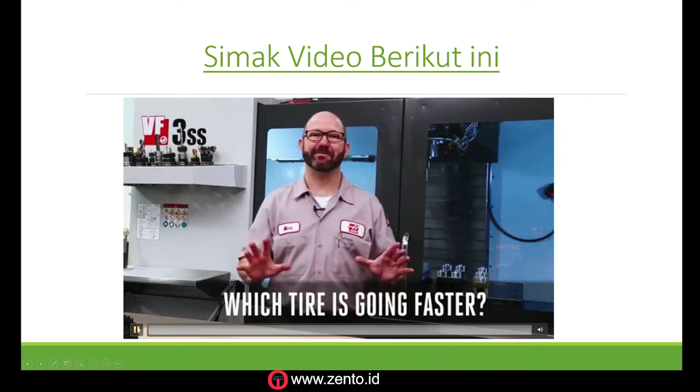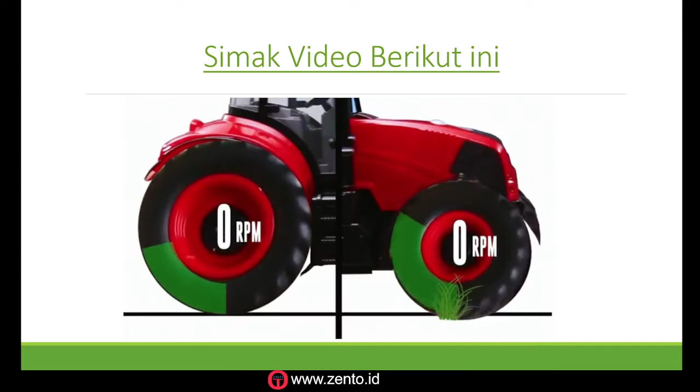That's it, pencils down, answers? I know, it's kind of a trick question. It depends on what I mean by faster. If what I am asking is how fast the tires are moving across the surface of the ground where the rubber meets the road, then both tires are traveling at the exact same speed, 17 surface meters per minute. Both tires travel the same distance where it matters, along the tire's edge. Now, if we're talking about revolutions per minute, RPMs, that's a different story. While both tires cover the same amount of ground, the smaller tire had to make more revolutions per minute to get there.

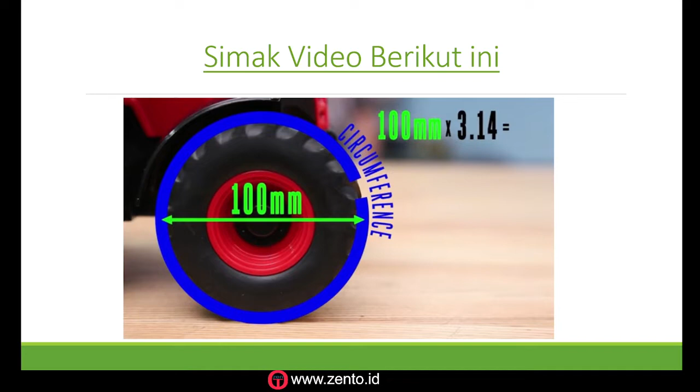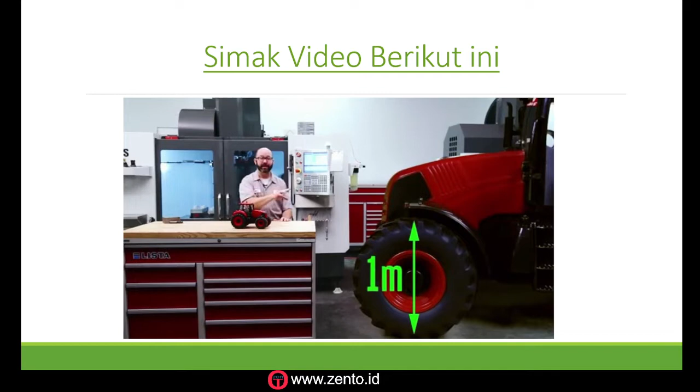If we want to calculate how much ground a tire will cover with each revolution, we need a ratio between a tire's diameter and its circumference. Someone has already figured this out for us and given this ratio a name, pi. The ratio between a circle's diameter and its circumference is pi. So no matter what diameter our tire is, the distance around the outside of that tire, where the rubber meets the road, is always 3.14 times greater. This tire, at 100 millimeter diameter, has a circumference of 314 millimeters. 100 times pi is 314. This tire has a diameter of 1 meter and a circumference of 3.14 meters. 1 times pi equals 3.14.

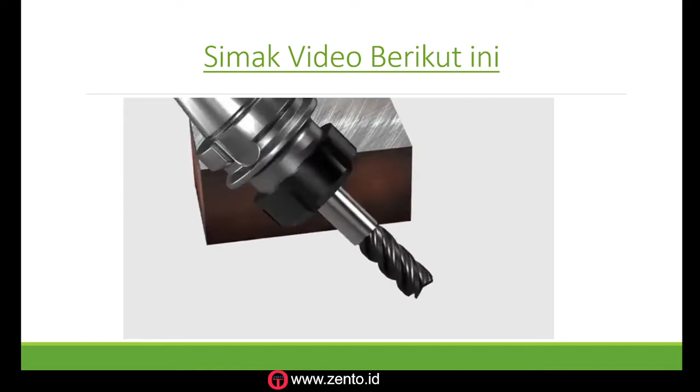Okay, back it up, get out of here. If we were to run our tires too fast, too many surface meters per minute, they would overheat, blister, and fail. Our end mills work in the same way. There's a limit, a maximum cutting speed that a specific tool can go on a specific material. Any faster, and it begins to overheat and quickly wears out.

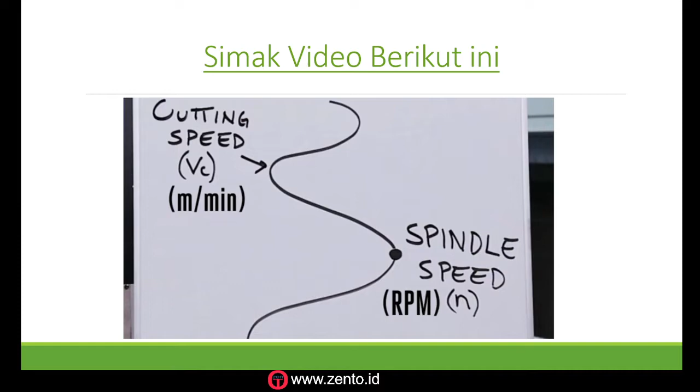In machinist talk, if we're talking about speeds, like speeds and feeds, we could be talking about one of two different things: cutting speed or spindle speed. Our cutting speed, VC, is our surface meters per minute, the speed our tool is turning at where the rubber meets the road, where the tool meets the part. Our spindle speed is simply our revolutions per minute, our RPM.

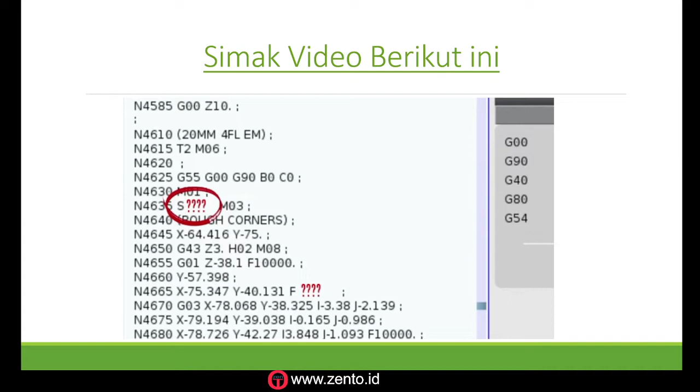We'll get our tool's cutting speed in meters per minute right from our tool catalogs. But the control, the Haas machine, needs an RPM value, a spindle speed, that's our S code. To get from here to here, we're going to use a formula that makes use of pi and our tool's diameter to convert our meters per minute into an RPM value, a spindle speed. Once we've got that RPM value, we can calculate our feed rates, speeds and feeds.

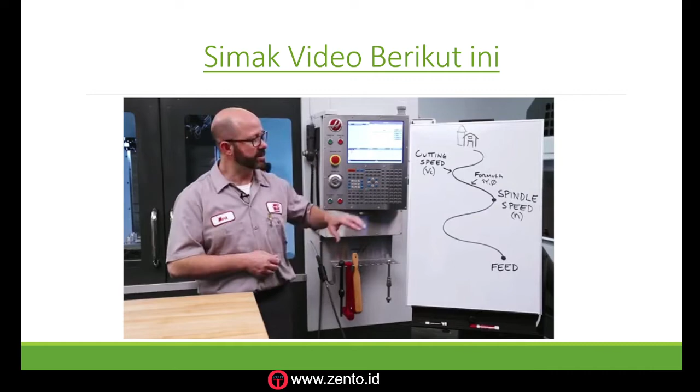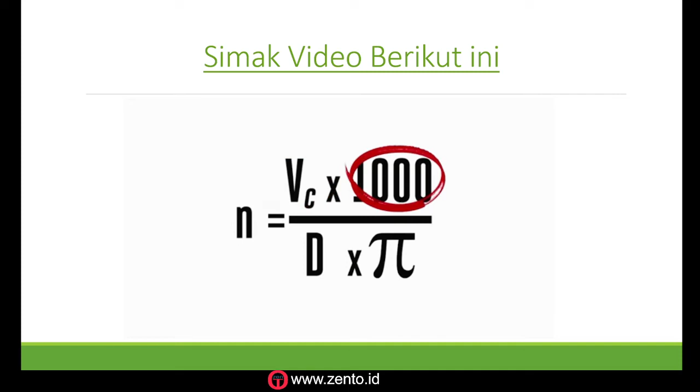Here is our formula to calculate our RPM. I'm going to start using some symbols, some notation, because those are the symbols being used by all the tool suppliers now, and you'll need to recognize them. RPM equals cutting speed times 1,000, all divided by our diameter times pi. N is our RPM, revolutions per minute, that's the S code in our program, what we're trying to solve for. VC is our cutting speed, our surface meters per minute. D, or sometimes DC or D1 depending on the catalog, is our tool diameter in millimeters. The 1,000 in this formula converts our meters per minute into millimeters per minute.

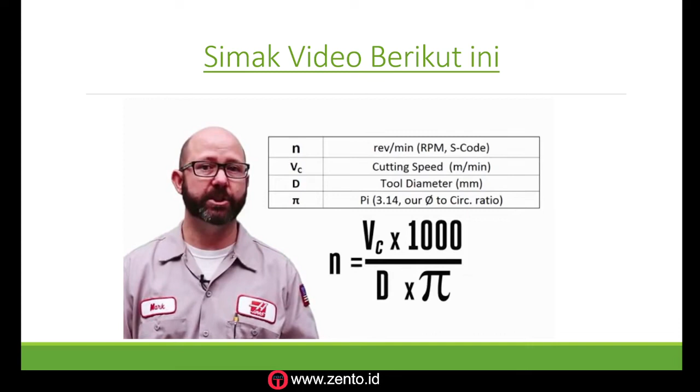This formula works fantastic, but we're going to simplify it a bit using algebra. We're going to divide the 1,000 by pi. 1,000 divided by pi is about 318. We're going to use this simplified formula for the rest of the video.

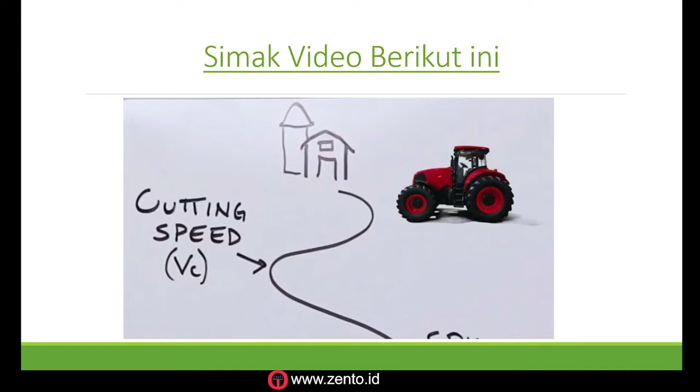Before we open up our catalog and get our cutting speed, before the tractor even leaves the barn, we need to know exactly what cutting tool we're going to use, and we need to know exactly what material we are going to be cutting.

In the good old days, all we really needed to know was whether our end mill was high-speed steel, carbide, PCD, or CBN. Those days are gone. Today's tools have coatings that might double their allowable cutting speeds, so we really need to know what tool we're working with. Otherwise we'll have to use generic values, which are pretty wimpy.

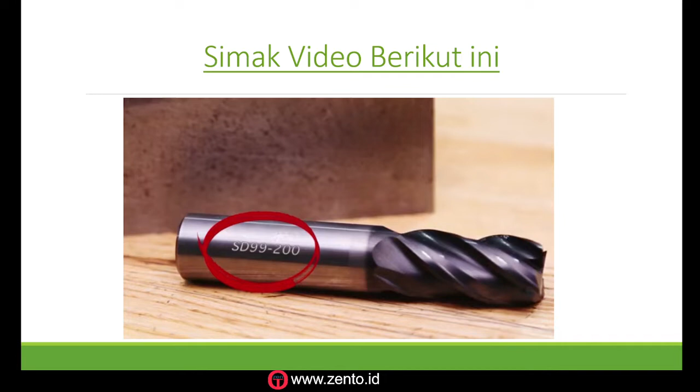With our exact tool number in hand, we can go to our tool catalog. We can download the manual for any tool manufacturer in PDF form. Once that catalog is opened up, we're going to search for the material group section, which tells us what material group our exact material falls into.

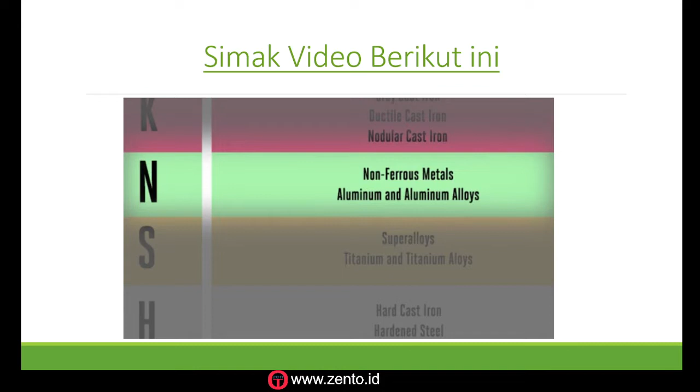Our materials are color-coded. P is for steels, M is for stainless steels, K is for cast irons, N is for non-ferrous metals without iron in them, like aluminum or magnesium. S is for our super alloys, materials like titanium, and H is for hard cast irons or hardened steels.

I am working with a 4140 steel. At least that's what we call it here in the United States. If you're in Europe using EN names and numbers, this might be called 42CrMo4. If you're in Japan, you'll call it something different. But no matter where you are in the world, this material is going to find itself in the P ISO material class.

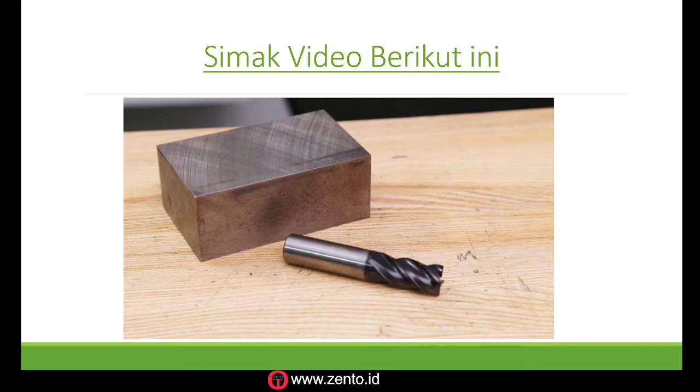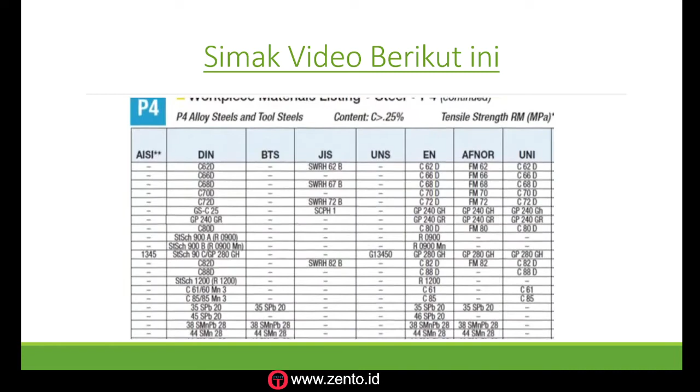Now, the number that follows our color-coded ISO letter changes between manufacturers, so be careful here. Kennametal calls this material a P4. Niagara and Seco may call it a P5. Sandvik classifies it as a P2.1, while ISCAR and WIDIA might call it a P6 or a P7. Same material, different tool vendor.

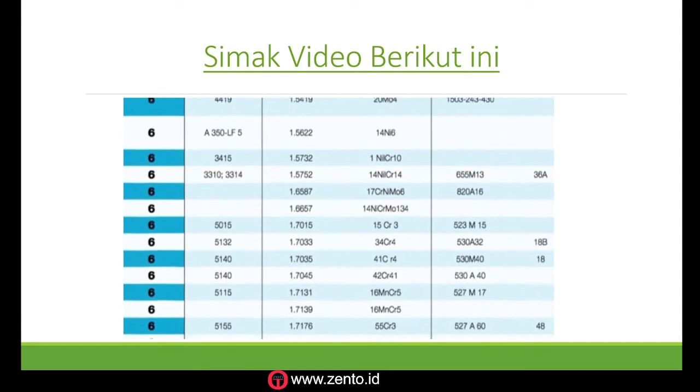Now, it's important that we get this right. If you don't choose the right material group, you are going to burn up your tools. Titanium has a different machinability than mild steel. If you try running a drill or an end mill in titanium at cutting speeds meant for mild steel, you are going to melt that tool. It will overheat and fail.

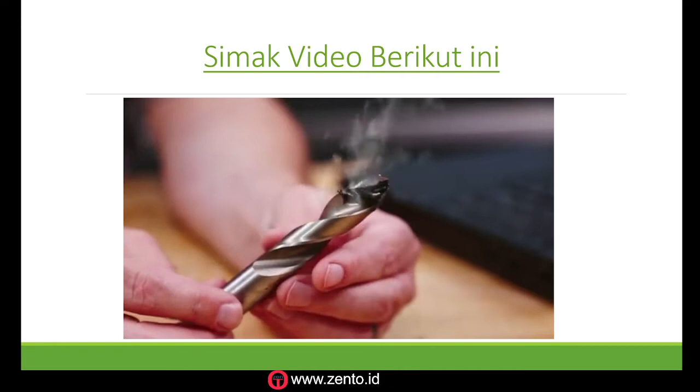So if you can't find what material group your stock should be in, then give your tooling representative a call. They would love to hear from you.

How many tooling reps out there would love to hear from one of our viewers and talk tools? Yeah, that's what I thought.

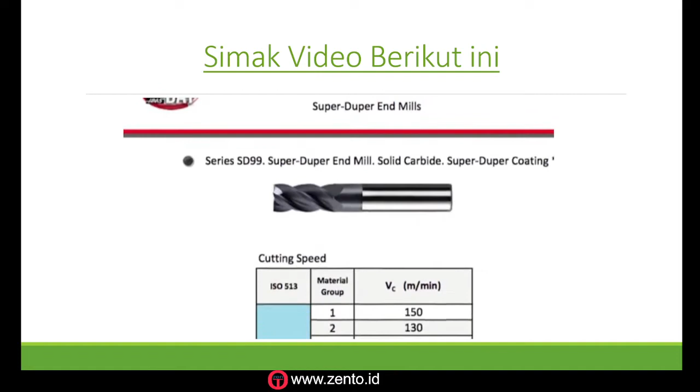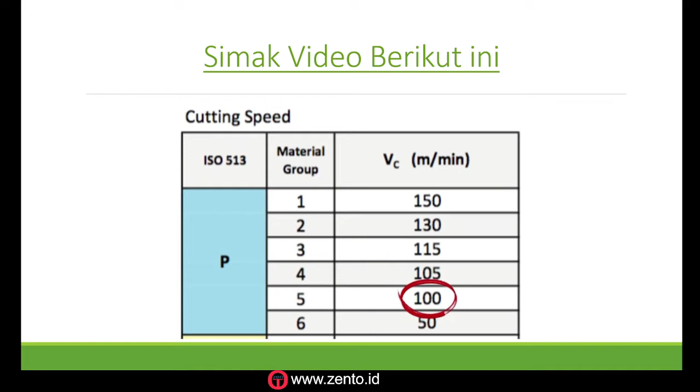From the section of the manual for our exact tool, under the row that lists our material group, P5 in our case, we're going to find our cutting speed, our VC, our meters per minute. If your catalog gives you a range of values there, then you'll make your choice based on the length of your tool, how strong your setup is, and how aggressive we tend to cut. In general, the more rigid the setup, the faster we can go with our cutting speeds. But remember, tools tend to last longer, have better tool life at lower cutting speeds.

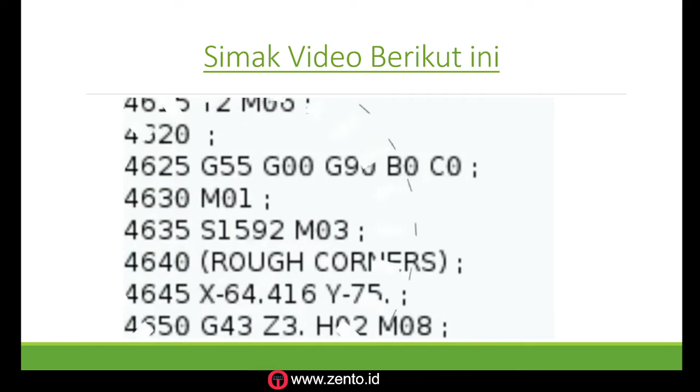For my tool and material, we're going to use a cutting speed of 100, that's 100 meters per minute. I'm using a 20 millimeter end mill, so we'll drop in 20 there. And after a little bit of math, we come up with an RPM value of 1,592. So our S code back in our program is going to be S1592.

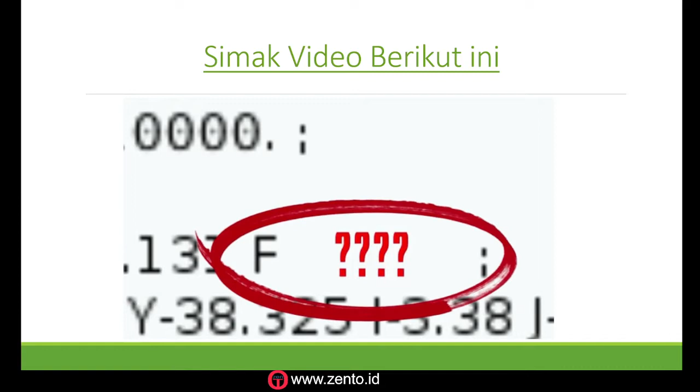We now have a cutting speed, an RPM value that we can use with our tool. We now know how fast to spin our tool, our speed. The control now needs our table feed, our F code or feed rate. The feed rate is how far the tool will travel in 1 minute in millimeters along the tool's center line.

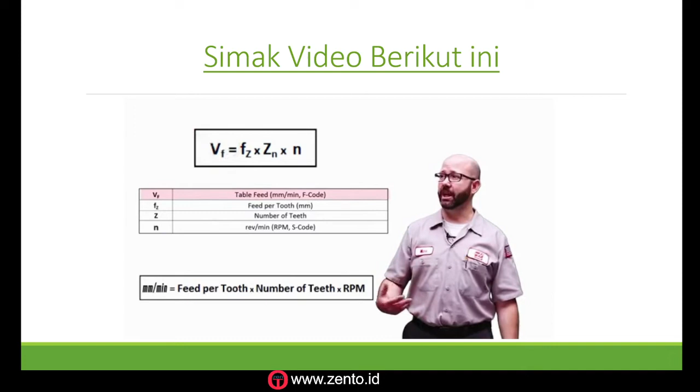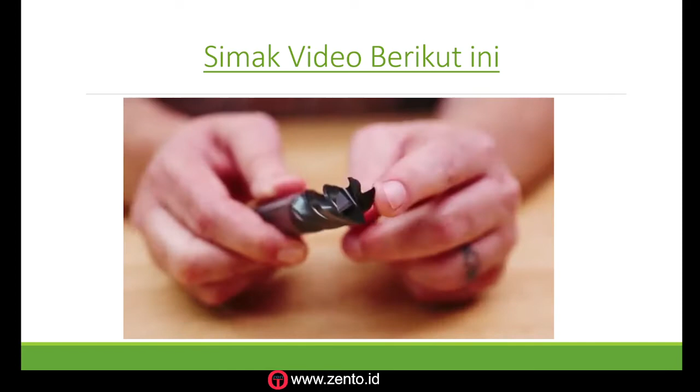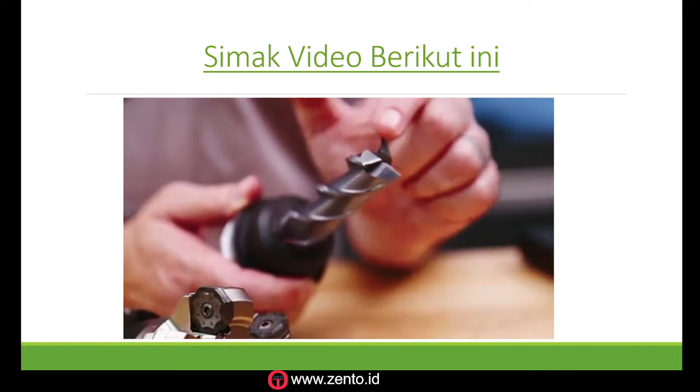Here's our feed rate formula for end mills. We've got our table feed equals our feed per tooth times the number of teeth times our RPM. So what's a tooth? This is a tooth, just a cutting edge along the outside of a tool. An insert is also a tooth. For most tools, the number of teeth matches the number of flutes. This tool has 3 flutes, 3 teeth. This tool's got 6 teeth, and this one's got 4.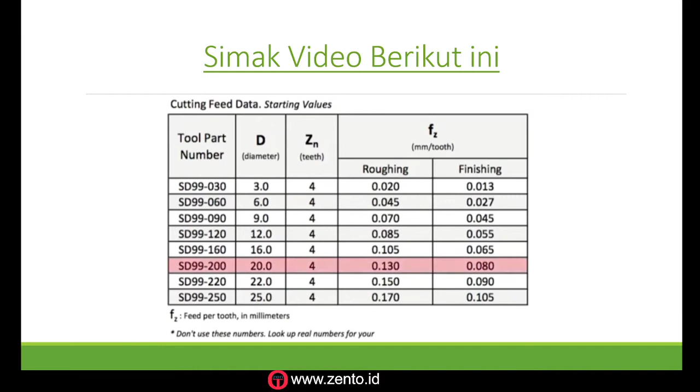We want our tool to take a very specific size bite with each tooth. This is our feed per tooth in millimeters. Just like our cutting speed, the book, or PDF, will give us that feed per tooth value. The catalog says that for my tool, material, and type of tool path, 0.08 millimeters per tooth is a good starting range.

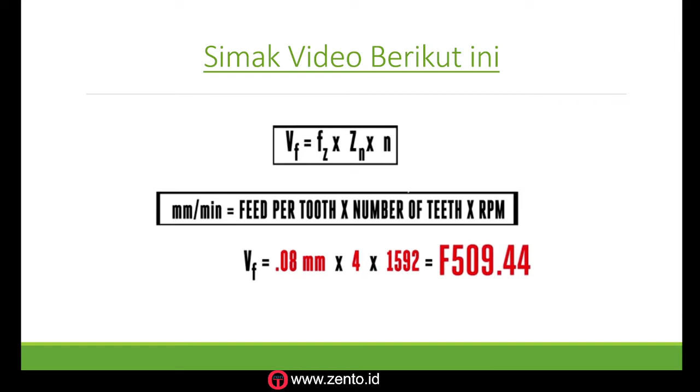0.08, our feed per tooth, times 4, our number of teeth, times 1,592, our RPM, will give us our millimeters per minute feed rate, F509.44. Again, this is how far the central line of our tool will move along its programmed path in millimeters.

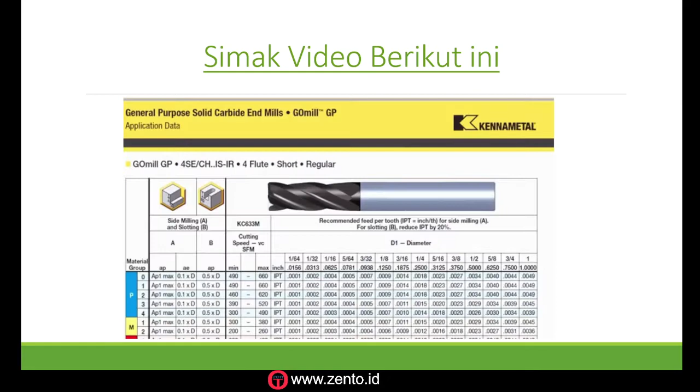Each and every minute. Some manuals will just give out a single feed rate for all cutting conditions, but most will give us at least two possibilities, one for slotting and one for side milling. Our AE is our width of cut, that's our step over, that's our radial depth of cut, and our AP is our axial depth of cut, how deep the tool is moving in the Z-axis.

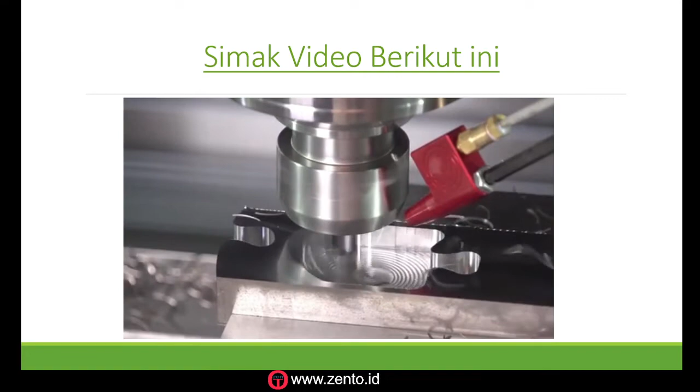Most times, if you're slotting, your bite is going to be about 20% less than if you're just side milling. With the popularity of optimized tool paths like dynamic, adaptive, volume mill type high-speed machining tool paths, the tool manufacturers are getting more and more specific with their speed and feed recommendations. So you'll often see charts like the one we'll show you here listing all kinds of different tool paths. You'll choose one and then match your speed and feed to the path that you're using.

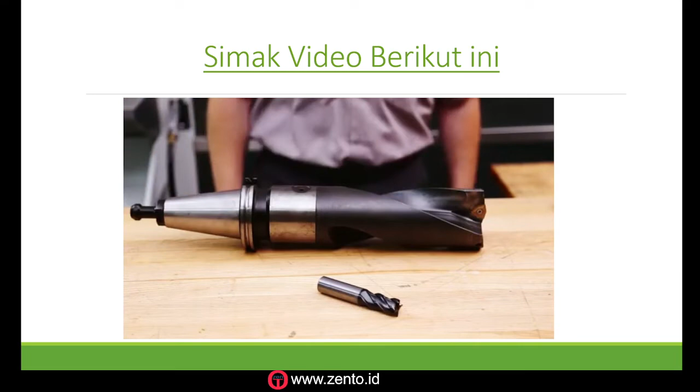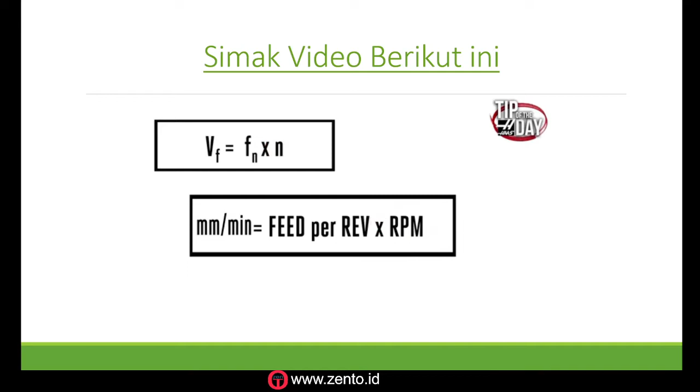Now, if you are dealing with drills and not end mills, our feed rate might be listed in our catalogs as a feed per revolution and not a feed per tooth. We just multiply the millimeters per revolution chip load from the book times our RPM to get our feed rate in millimeters per minute. Now watch out for and know the difference between millimeters per tooth, FZ, which we typically use for milling tools, and millimeters per revolution, FN, which we often use for drills.

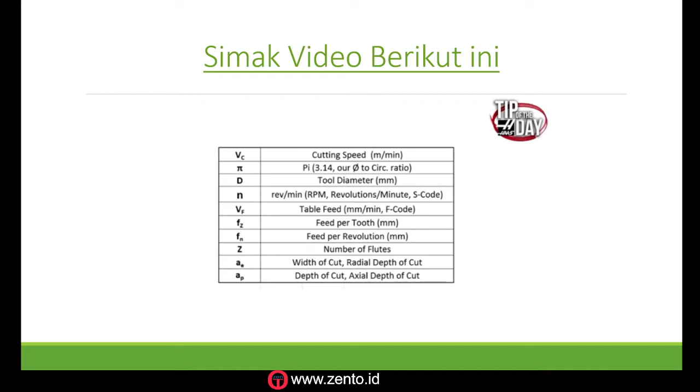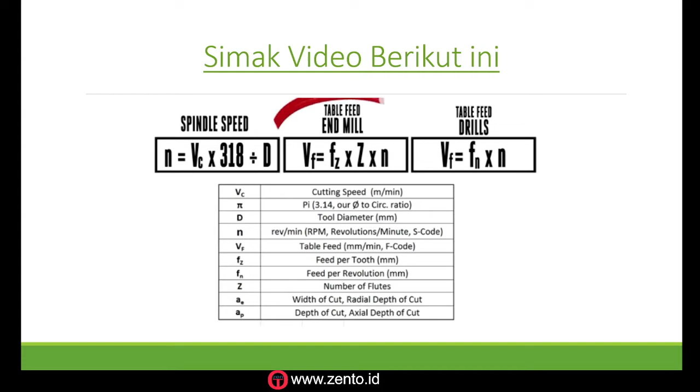Here's that completed legend and the formulas we typically use for calculating our speeds and feeds. We've got our cutting speed formulas, spindle speeds. We've got our feed rate formulas for both end mills and drills. And we've got all of the notations, all the symbols that you're going to see over and over again in your tool catalogs.

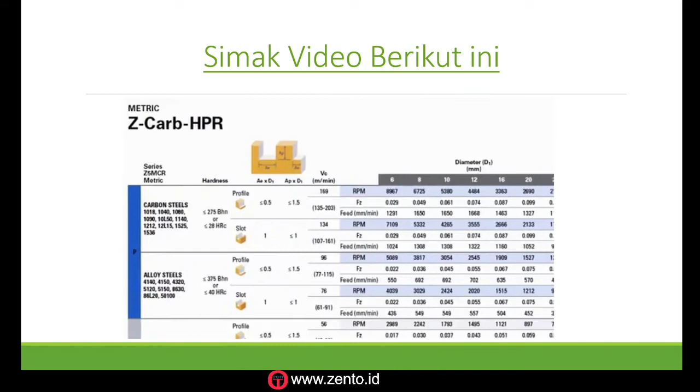With all of that said, there's a big shift happening with tooling catalogs in general. A lot of these tooling catalogs are just giving us our feed rate and RPM values. No formulas needed. You may open up your manual and find that you don't have to do any math at all.

Okay. In the past, we used to have to rely on slide rules to calculate our RPM and feed rate. I still like these. I think they're great. But today, we're more likely to use an app on our phone or a piece of software on our computer or the speeds and feeds calculator right on the Haas control.

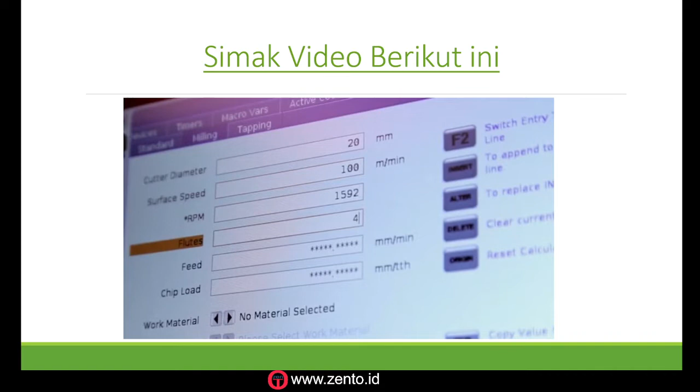On machines with next-gen controls, you can reach the milling calculator by pressing current commands and navigating to the milling tab. We've made some videos that help you calculate those tapping feed rates. We'll link to those in the description.

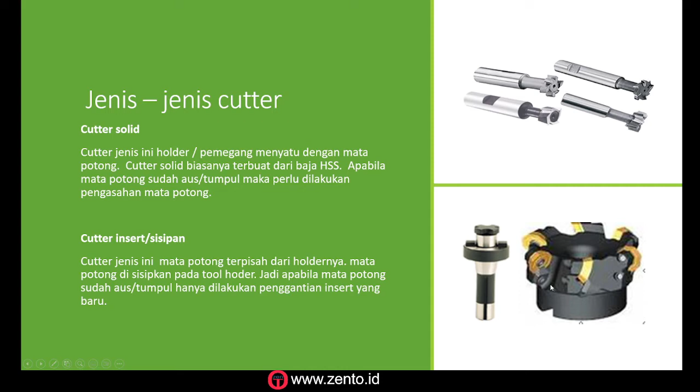Pada cutter insert atau sisipan jenis ini, mata potong terpisah dari holdernya. Ini holdernya, dan ini mata potongnya yang berwarna kuning. Mata potong itu disisipkan pada tool holder atau pemegang tool. Jadi apabila mata potong sudah aus atau tumpul, hanya perlu dilakukan replace atau penggantian insert yang baru, tidak perlu mengasah. Kita buka bautnya, lalu ganti dengan insert yang baru. Seperti itu pada cutter sisipan.

Macam-macam cutter milling, ada beberapa macam. Misalkan ini yang facing, disebut face mill. Face mill ini fungsinya untuk melakukan pemakanan rata atau facing seperti ini.

Kemudian yang ini ada shell mill, dia pemakanan ujung dan samping. Kalau face mill dia hanya ujungnya saja. Ini nampaknya yang face mill, dan ini yang shell mill.

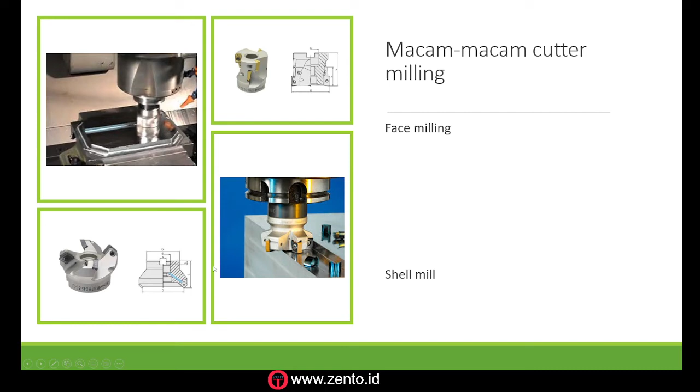Kemudian ini ada yang end mill seperti ini, dia makan ujung dan samping. Ini bahan end mill. Kemudian pada high speed drill, seperti ini untuk pengeboran dengan kecepatan tinggi. Ini ada insertnya di sini, bisa diganti. Ini namanya holder atau tool holder. Ini pada proses high speed drill, kalau ini pada proses end mill.

Nah, ini adalah jenis cutter yang solid. Berdasarkan penampangnya ada flat mill, berarti dia flat ujungnya. Ada ball end, berarti dia setengah lingkaran. Ada yang taper end, berarti dia menyudut, membuat tirus. Ada bull nose, ujungnya ada radiusnya atau R-nya.

Berbeda dengan flat, kalau flat semua dia menyudut 90 derajat, kalau bull nose dia ada R-nya. Yang ini ada drilling end, berarti fungsinya untuk melakukan drilling atau pembuatan lubang. Ini macam-macam jenis end mill berdasarkan penampang pemotongannya.

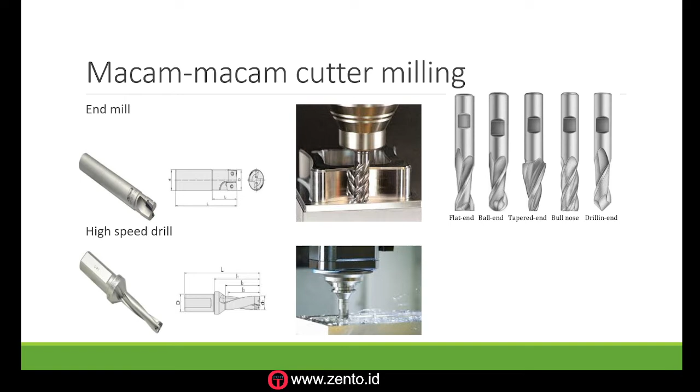Selanjutnya adalah tentang metode pemotongan. Ada dua yang kita kenal, yaitu metode climbing dan konvensional. Yang climbing yaitu pengefraisan climb mill di mana putaran cutternya searah.

Ini mata potongnya searah dengan gerak benda kerja. Gaya potong menarik benda kerja ke dalam cutter sehingga tebal potongan akan lebih besar, dan resikonya akan lebih besar dengan metode climbing. Kemudian yang konvensional merupakan pengefraisan di mana putaran cutter berlawanan dengan gerak benda kerja. Ini dimulai dengan beram yang tipis, jadi seperti mencangkul.

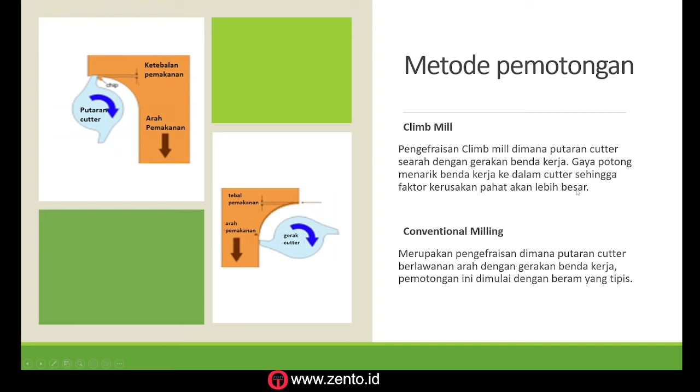Ini metode kita menggunakan antara climbing dan konvensional milling. Selanjutnya yang ketiga adalah pemotongan netral, biasa kita pakai pada pemotongan dengan end mill cutter. Pemotongan netral yaitu pemotongan yang terjadi apabila lebar benda yang disayat lebih kecil dari ukuran diameter tool.

Pemotongan jenis ini hanya berlaku untuk mesin frais vertikal. Pemotongan diawali dengan pengefraisan berlawanan arah sampai di tengah benda kerja. Pada permulaan proses pemotongan ini, ketebalan beram tatalnya 0 dan bertambah besar secara tetap.

Selanjutnya setelah proses pemotongan berada tepat di tengah-tengah, maka mulailah pengefraisan searah dan ketebalan beram bertambah. Untuk mencegah hasil pemotongan yang tidak baik dari gaya potong yang berubah-ubah akibat tidak samanya ketebalan beram, maka pisau frais harus minimum lebih besar 2/5 kali lebar benda kerja.

2/5 kali lebar benda kerja untuk mata pisau frais yang kita gunakan kalau kita dengan pemotongan yang netral.

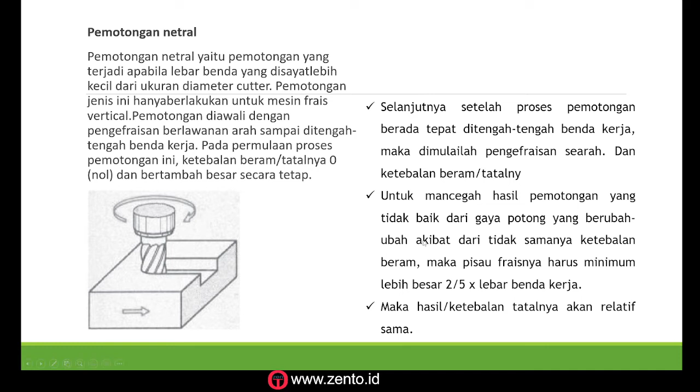Dari hasil video tadi kita dapat simpulkan rumus spindle speed, di mana N adalah RPM, VC adalah kecepatan potong kali pi dibagi D adalah tool diameter.

Kemudian table feed untuk end mill ini ada perbedaan dengan drill. Kalau end mill, VF yaitu table feed sama dengan FZ, feed per tooth, dikalikan Z yaitu jumlah flute atau jumlah giginya, dikalikan N. N adalah putaran spindle. Beda dengan drill, kalau drill cuma VF sama dengan FN kali N saja, tidak dikalikan jumlah giginya.

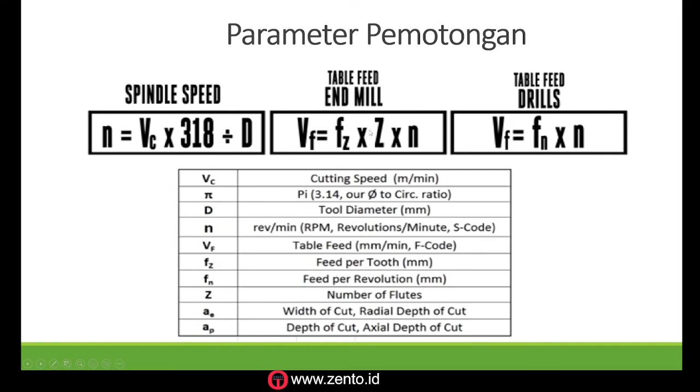Kecepatan potong adalah suatu harga yang diperlukan dalam menentukan kecepatan pada proses penyayatan atau pemotongan benda kerja, di mana harga kecepatan potong tersebut ditentukan oleh jenis alat potong dan jenis benda kerja yang akan dipotong.

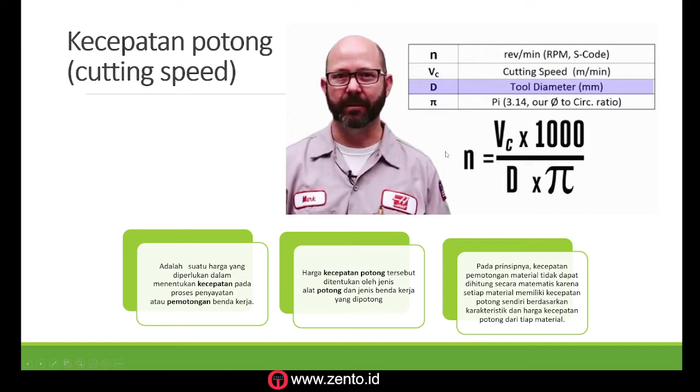Rumusnya: N sama dengan VC kali 1000 per Pi D. VC adalah cutting speed, satuannya meter per menit, D adalah tool diameternya. Pada prinsipnya kecepatan pemotongan material tidak dapat dihitung secara matematis karena setiap material memiliki kecepatan potong sendiri berdasarkan karakteristik dan harga kecepatan potong dari setiap material. Ini tentang penjelasan cutting speed.

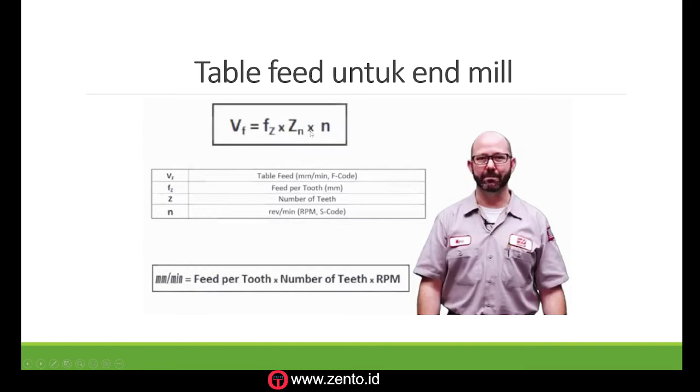Selanjutnya table feed untuk end mill yang tadi sudah kita jelaskan, di mana VF adalah table feed sama dengan FZ, feed per tooth, yaitu kecepatan per giginya, dikalikan Z adalah number of teeth atau jumlah mata potongnya, dikalikan N adalah RPM-nya. Ini untuk end mill.

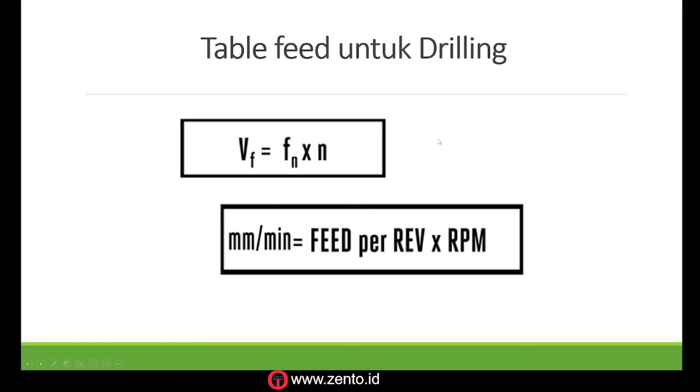Kalau drilling, dia langsung FN dikalikan N saja, tidak dikalikan jumlah mata potongnya.

Pada prinsipnya kecepatan pemotongan material tidak dapat dihitung secara matematis, karena setiap material memiliki kecepatan sendiri berdasarkan karakteristik dan harga kecepatan potong dari tiap material. Untuk menentukan kecepatan potong, ditentukan dari bahan yang akan dipotong.

Ini adalah tabel kecepatan potong berdasarkan bahan benda kerja. Misalkan kuningan perunggu, maka kita gunakan VC antara 30 sampai 45. Ini adalah angka empiris, jadi nanti tetap harus dihitung, tapi patokannya dengan nilai ini.

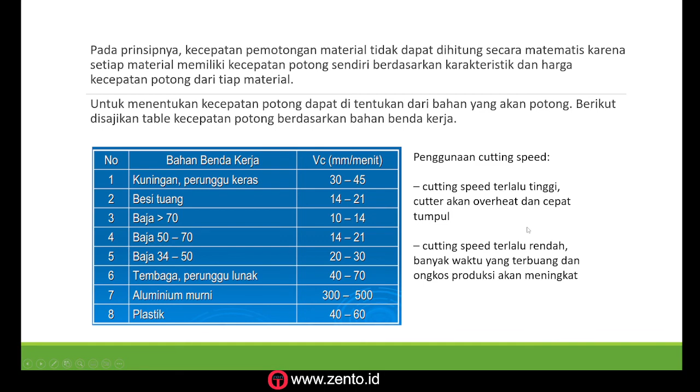Kemudian kecepatan potong dan feed rate. Kecepatan potong merupakan surface feet per menit, SFM, disebut juga kecepatan permukaan, atau hanya kecepatan, adalah perbedaan kecepatan relatif antara pahat pemotongan dan permukaan benda kerja tempat ia beroperasi. Ini dinyatakan dalam satuan jarak sepanjang permukaan benda kerja per unit waktu, biasanya permukaan feet per menit atau meter per menit.

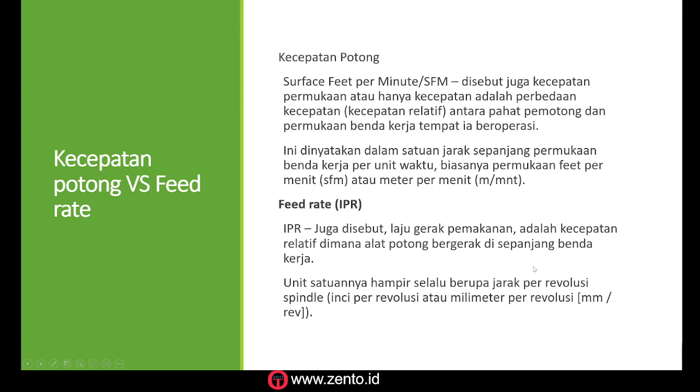Kemudian feed rate atau IPR, itu laju gerak pemakanan, adalah kecepatan relatif di mana alat potong bergerak di sepanjang benda kerja. Unit satuannya hampir selalu berupa jarak per revolusi spindle. Ini tentang kecepatan potong dan feed rate.

Sekarang kita mengenal feed rate, ini F. Jarak yang ditempuh oleh pisau dalam arah linear yang diukur dalam satuan milimeter per menit.

Feed rate dalam proses frais ditentukan berdasarkan jumlah gigi atau Zn, kemudian gerak makan yang bekerja tiap gigi atau chip load atau FPT, feed per teeth, dan yang selanjutnya adalah putaran pisau frais atau N, jumlah putaran dalam menit.

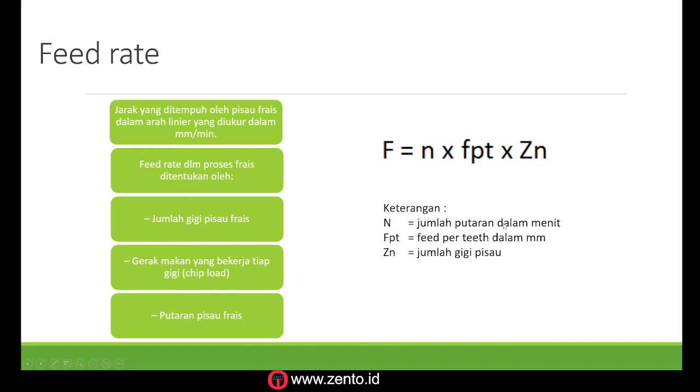Jadi untuk rumusnya, F adalah feed rate sama dengan N jumlah putaran kali FPT feed per teeth kalikan Zn jumlah gigi pisaunya. Tadi sebenarnya sudah disampaikan di awal.

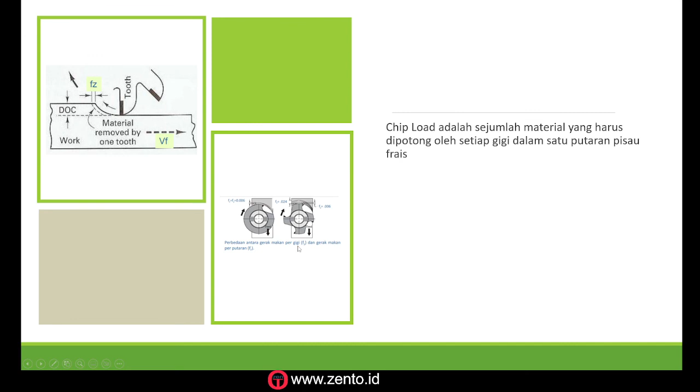Chip load adalah sejumlah material yang harus dipotong oleh setiap gigi dalam satu putaran pisau frais seperti ini. Ini perbedaan antara gerakan makan per gigi dan gerakan makan per putaran. Bedanya di sini.

Ini contohnya. Diketahui pisau HSS end mill diameter 40 dengan jumlah gigi 6, dipergunakan menyayat besi ST36, kecepatan potongnya 25 meter per menit, kecepatan per giginya 0,02 mm. Berapa putaran mesinnya? N sama dengan VC kali 1000 per πD sama dengan 199, kita bulatkan jadi 200 putaran per menit.

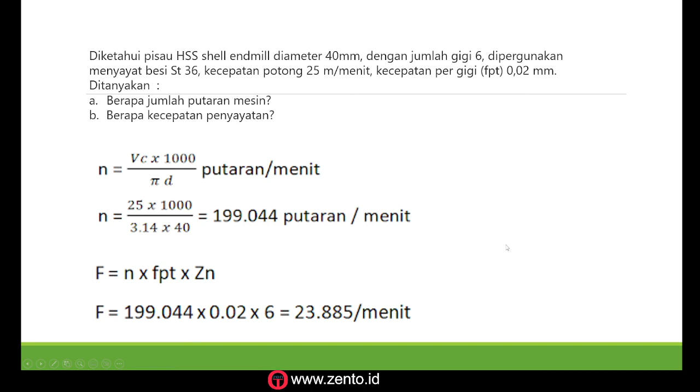Untuk F-nya, feed rate-nya, kecepatan penyayatan adalah N kali FPT kalikan Zn. N-nya adalah 200, kalikan FPT-nya 0,02, kalikan 6, yang merupakan jumlah giginya. Berarti hasilnya 23,885 per menit untuk feed rate-nya.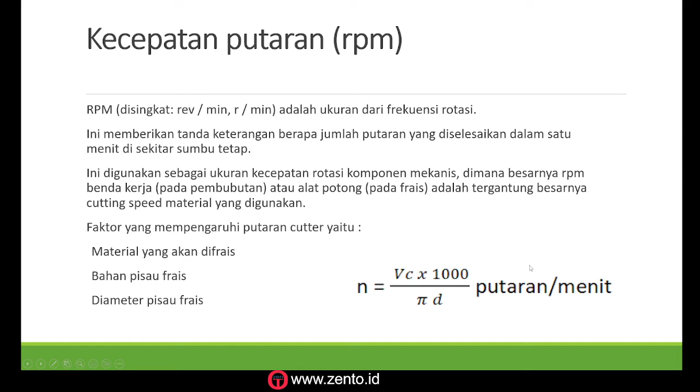Ini kecepatan potong, kecepatan putaran, RPM, adalah ukuran dari frekuensi rotasi. Tadi sudah kita sampaikan rumusnya, N sama dengan VC kali 1000 per πD.

SFM adalah kombinasi dari diameter dan kecepatan RPM dari bahan yang diukur dalam feet per menit sebagai poros dari mesin frais, atau istilah lain adalah cutting speed, CS. Semakin cepat spindle berputar, semakin kecil diameternya, maka akan semakin tinggi SFM atau cutting speed-nya. Tujuannya adalah untuk alat yang bekerja menjalankan SFM setinggi mungkin agar dapat meningkatkan produksi bagian per jamnya.

Ini sesuai dengan batasan fix seperti ini. Misalkan material stainless, maka SFM-nya sekian. Ini materialnya minimal SFM-nya sekian, median dan maksimumnya, CS-nya sekian.

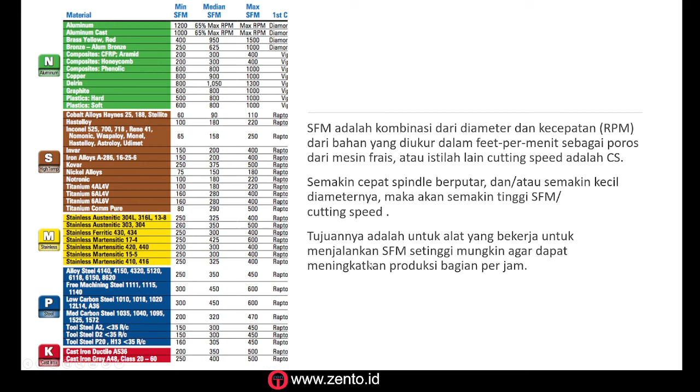Ini adalah angka-angka berdasarkan pahat dari Sandvik. Kerja akan berjalan lebih baik pada nilai SFM cutting speed tertentu. SFM sama dengan RPM kali 0,26 kali tool diameter. Ini rumus yang digunakan kalau kita menggunakan part Sandvik. Referensinya adalah www.tenitool.com.